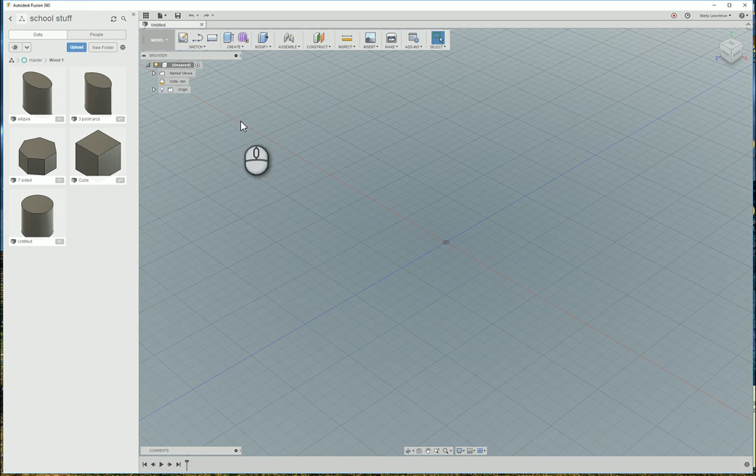Okay, the last object to draw on the sheet is the hexagon. There's a lot of things going on here and there's lots of ways you can tackle this. I'll just go through this in one method of doing it. There could be many methods of doing it.

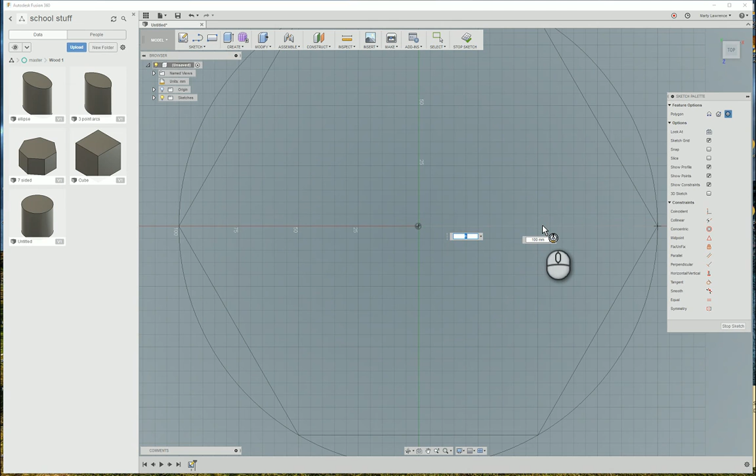So we'll start a sketch. We'll choose the base plane. Then we're going to choose the polygon again, inscribed. And we'll start at the center point, click once, drag it out. Try and follow that line, that makes it a little bit easier later on. It needs to be 100 diameter, and so we can tab that, that'll lock it in place, and it should be 6 sides, which it is. Press enter. Then we'll stop the sketch.

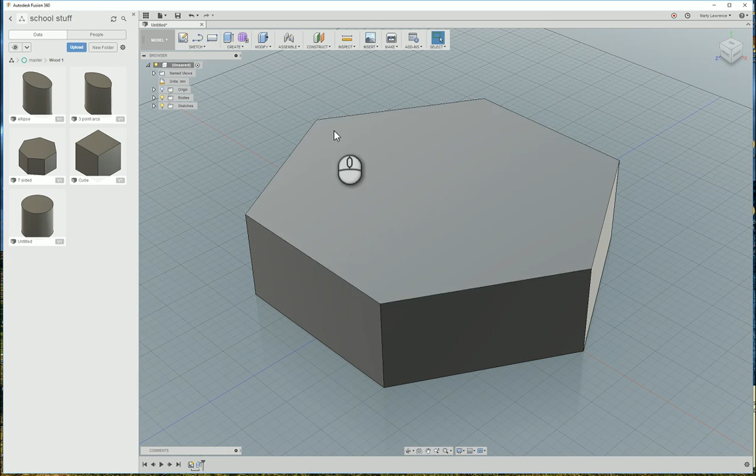I'll change the zoom a bit. Extrude. Select the face, 50 high. Again, make sure it says new body, and I'll click OK this time. The next easiest thing to do is going to be that cutout that's in the top. So one of the ways we can do that is with this offset tool, or the O. So we're going to click that.

Again, it needs to know what face you're going to work from. So we'll click the face, and it's asking which curves. When it says curves, that could be lines as well. So click that line, and we don't want it to go this way, so it needs to be a negative number. See this? And we'll go -10. Looks good. Click OK. We'll stop the sketch again.

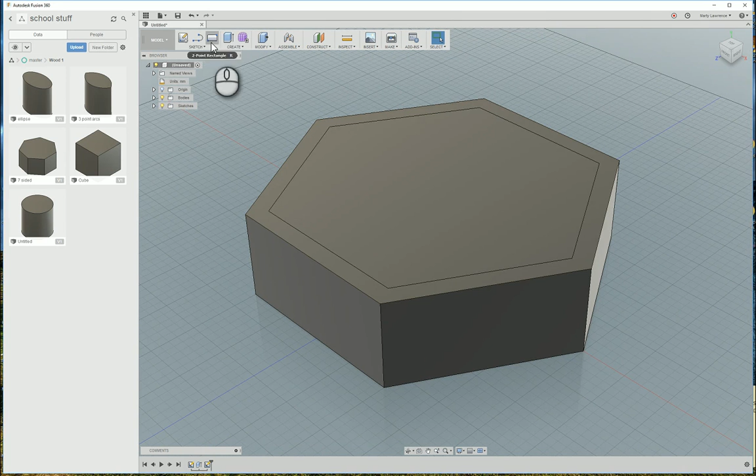We'll do an extrude again, this time only selecting that new hexagon, which is a bit smaller, and we need it to go down, so I think -10 will be, yeah, that looks pretty good. Make sure it says cut this time, and we'll simply click OK.

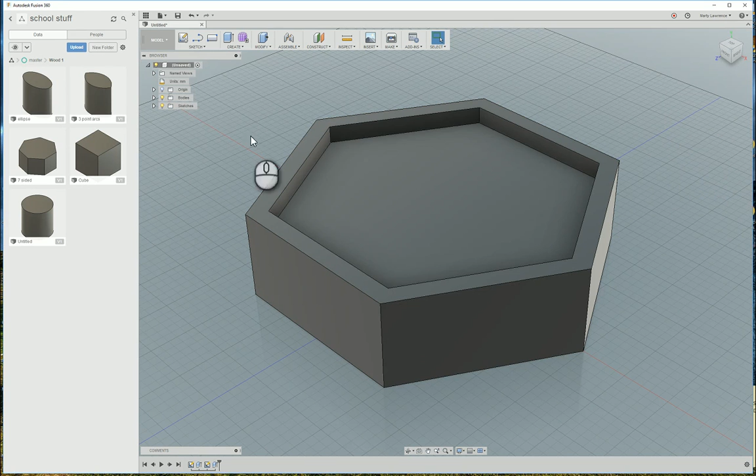Next step, I think we'll do the circle with the threaded hole. So we'll start a new sketch. We'll select the face, so that face, we're going to start the circle at the center there. So we can go circle. Remember, we could hit C on the keyboard. Center diameter circle. And we'll click at the center point, and we can adjust this to whatever size, but I think 30 might look pretty good. Press enter.

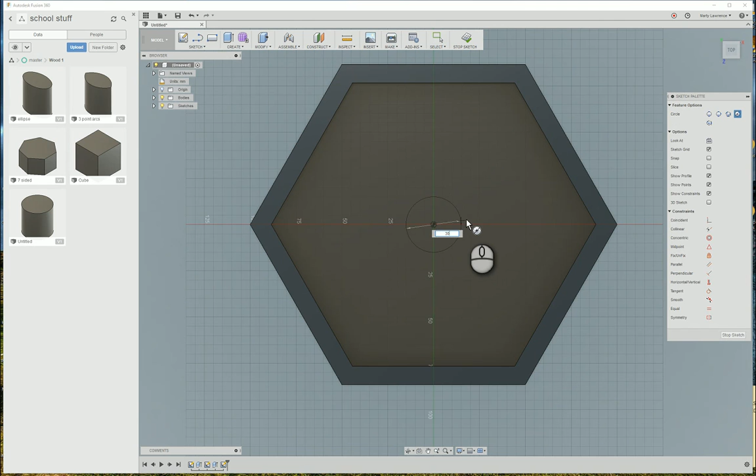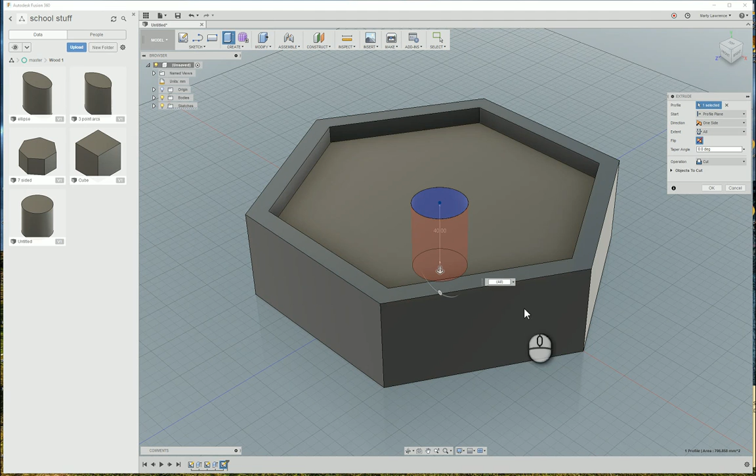We'll stop the sketch, and we're going to extrude that. Make sure we select that profile, only that circle, and this time we're going to cut through the object. So what I'm going to show you this time is we're going to cut through all. So we're going to click that all. Now this at the moment is going, what? There's nothing to cut in this direction, so I'm going to drag it down. And now we're going to click all, and we'll go through the whole object. Make sure it says cut, and we're all good. Click OK. Let's put a thread on that hole, and make it look pretty nice.

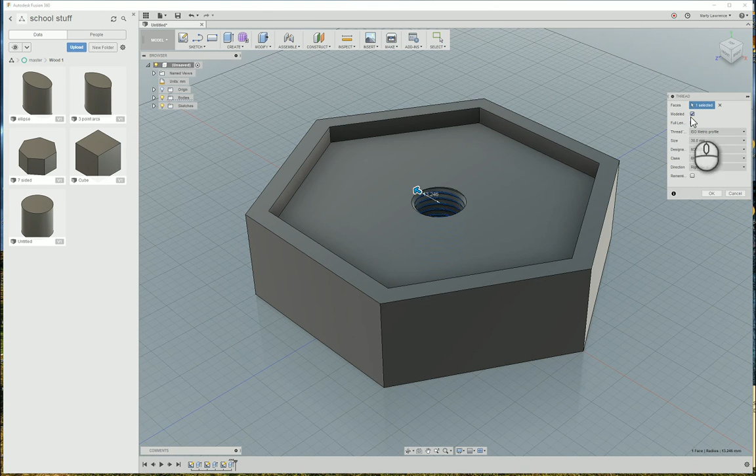So in create thread, which face do you want to put the thread in, and select that internal face. This is always going to look better if you click the modeled, and you can actually see the thread forming there. There's lots of settings here. We don't really want to change anything, or need to, and simply click OK. There we go, we've got a threaded hole running through the object.

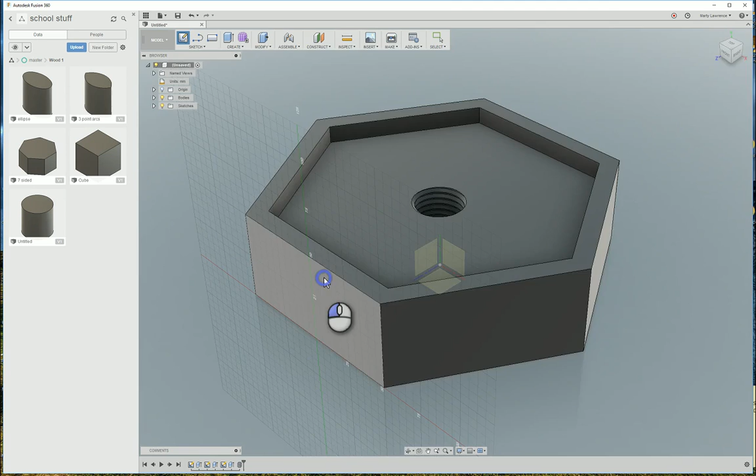We're going to do these slots next, in the side, 2 slots. So we're going to create a sketch on this face. So let's click the face, it turns to change view. It's going to be easy if we draw a center line here, so we know where the center is. So we're going to use the line tool. Notice we get the little green triangle to indicate that we're midpoint. That's what you want, midpoint. Ignore what's going on in the back there. Touch this line. That's good. Let's do another line this way from midpoint to midpoint.

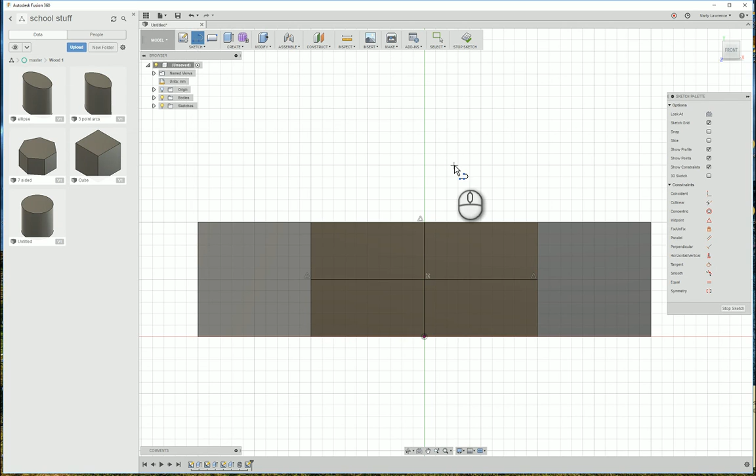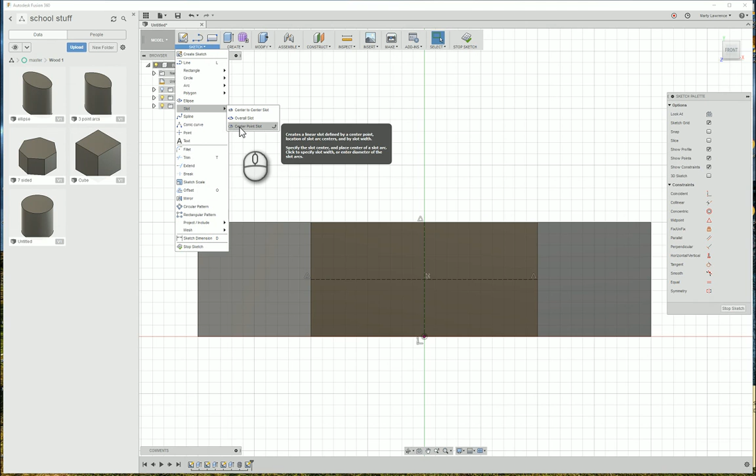Right. What I'd like you to do now is escape on the keyboard. Select this line, select that line so it turns blue, and we change that to a construction line. And also select this one, we'll change that to a construction line. It's a bit hard to see, but that'll be a dashed line. Now, let's select the center point slot. And we'll click our center point. You should get a tooltip to show where the center is.

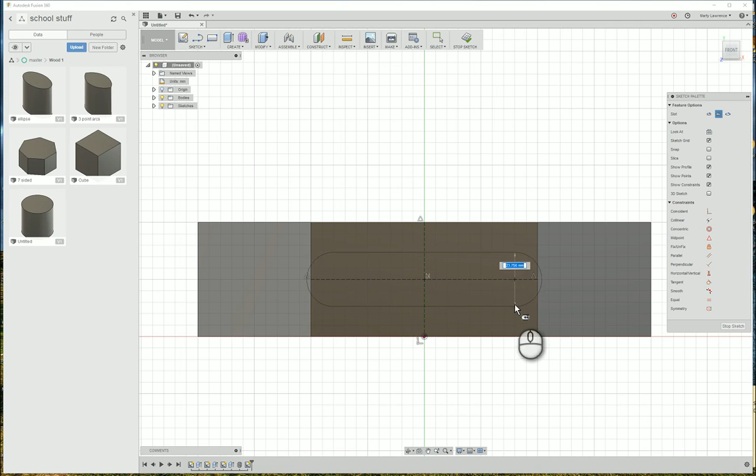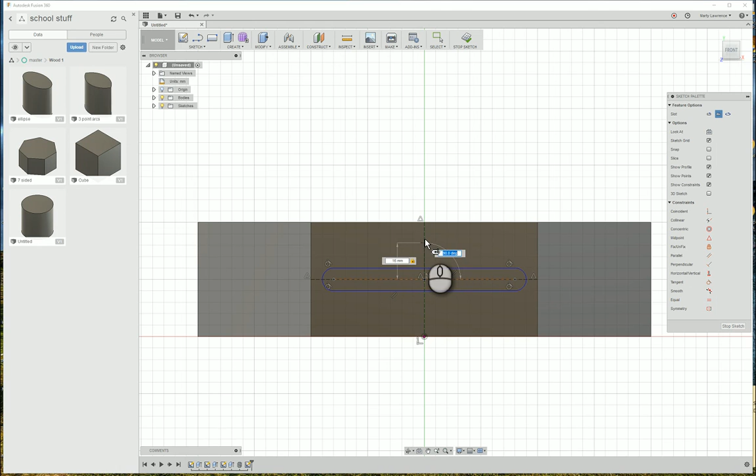So center point. Click. Let's go up. I think about 16 millimeters should look pretty good. I'll click tab to lock that in. It's at 90 degrees and just click. Now move the mouse out to the side and we'll go 10 millimeters. Press enter and there's our two slots intersecting each other. I'm going to click stop sketch.

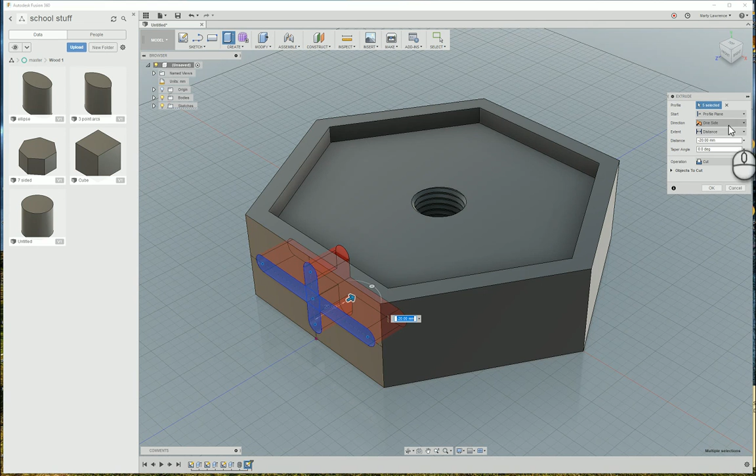We're going to do an extrude and this time we're going to make sure we select these parts that make up that slot. We'll select all of them. This time we're going to run through, we're going to show you this other command. Under extent, let's go to object. And it's asking us now which object are we going to go through. That's why it's got select.

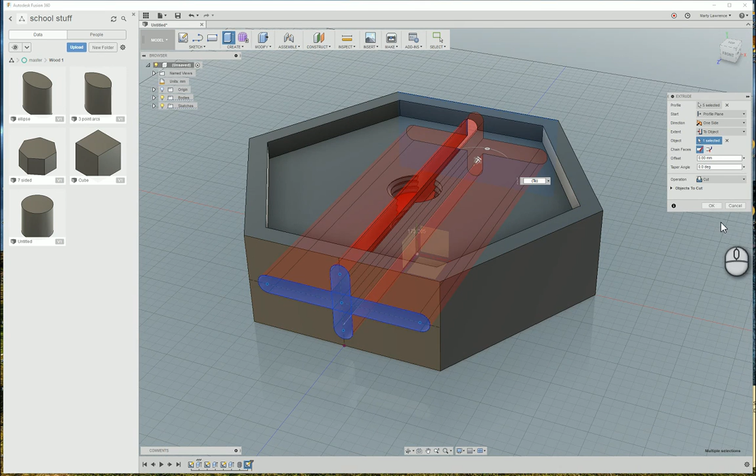So we're going to go through to that face and that should cut all the way through, even through that threaded hole. And make sure it does say cut. If it doesn't show up for some reason, try clicking this one. And cut. It's all good. Click OK. The last thing we want to do is the text on the side.

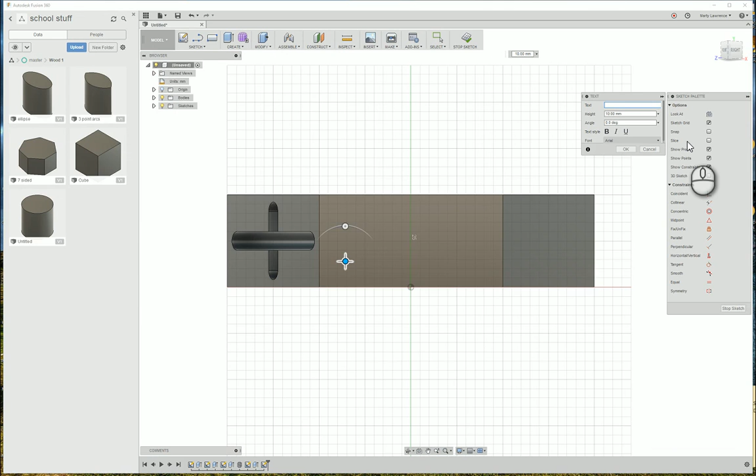So you can write whatever you want, but again, we start it with a sketch. Select the face. Select text. Click roughly where you think you want the text to start. And up here, we're going to type. Alright, that's a bit small. Just notice the height. This is 50 high, so maybe if we choose something like about 30, yeah, that looks a bit better. It's a better size.

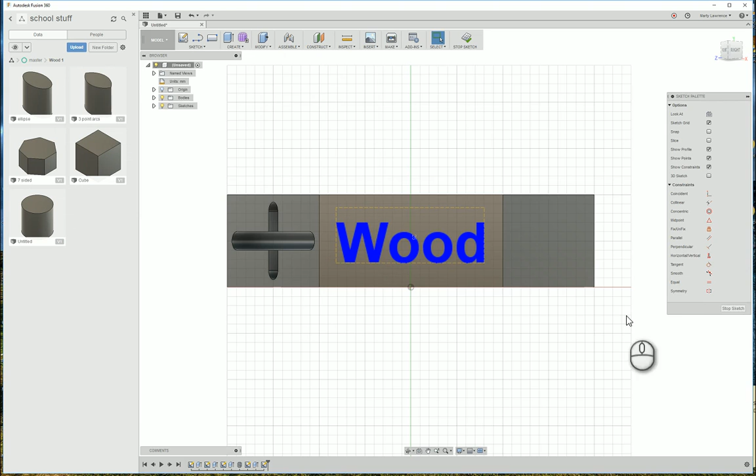You can change the font if you want. You can change the angle. I'm going to choose bold. And if it's not quite centered, grab that little handle there and we can adjust that so it's roughly centered. When you're happy, click OK, and then of course stop sketch.

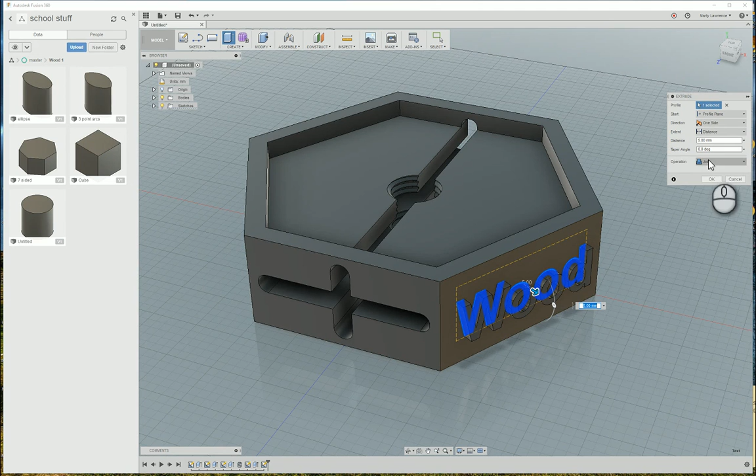Then we're simply going to extrude, select that, the words, the text, and 5 millimeters, maybe 10 millimeters, whatever you like, whatever you think is going to look good there. I'm happy with 5 millimeters. This time make sure it says join and click OK. And there's our object finished. Let's click save. All done.